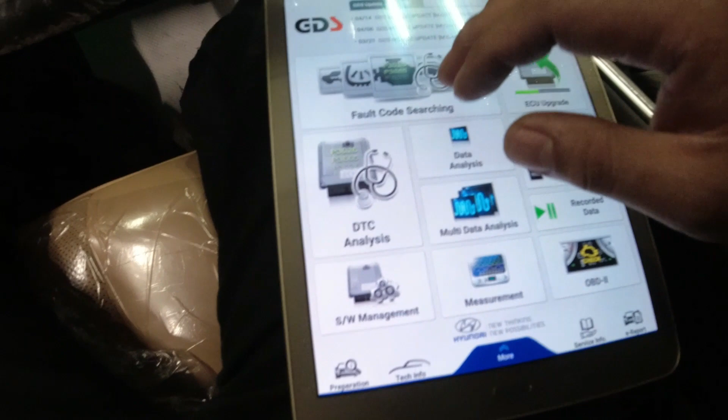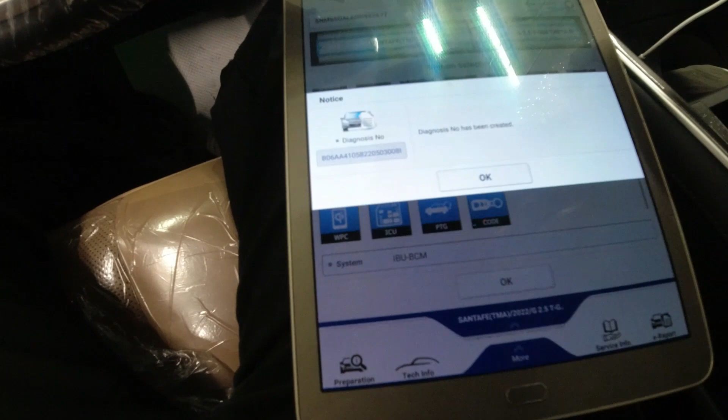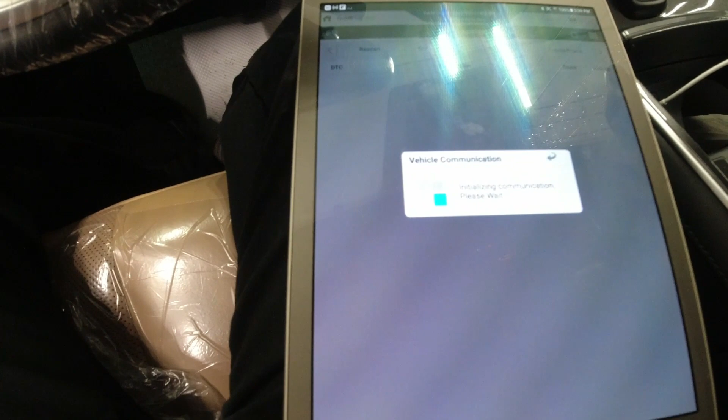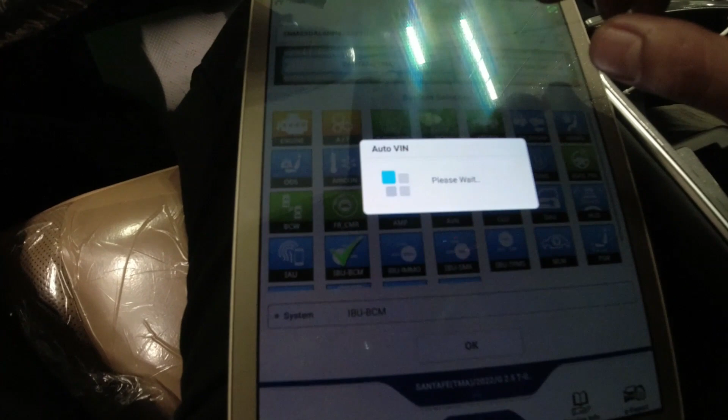Next, we're gonna do a system scan for codes, and we'll go for IBU because it's part of the body control unit. Okay, there's nothing in there, so maybe it's not in the body control unit. We go ADAS parking.

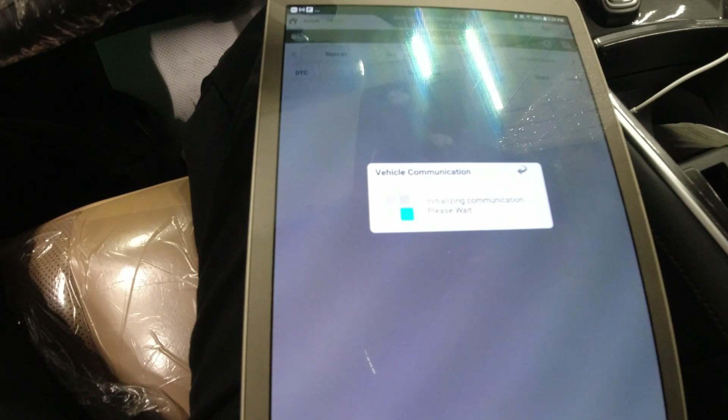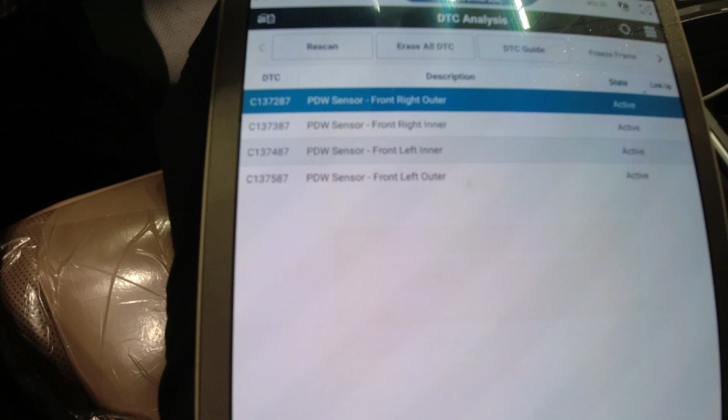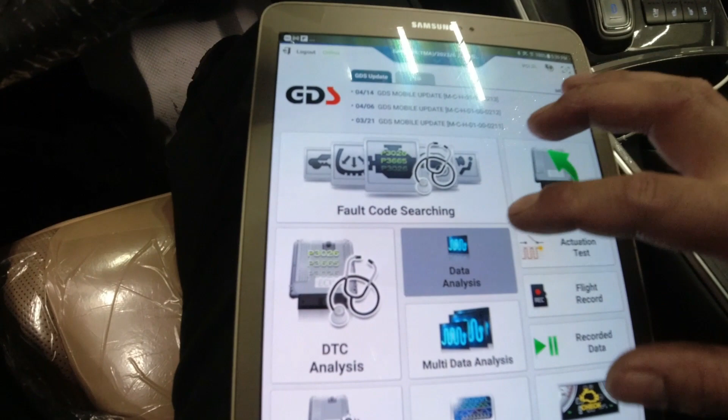Okay, so we have active codes here: front right outer, front right inner, front left inner, and then front left outer. So let's go back to our data. Let's just see what those sensors are doing.

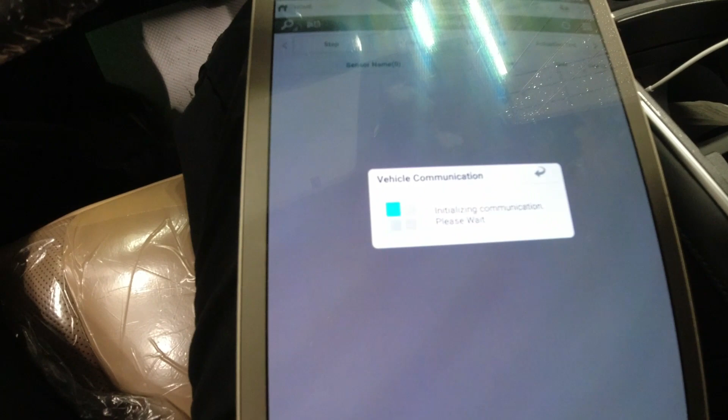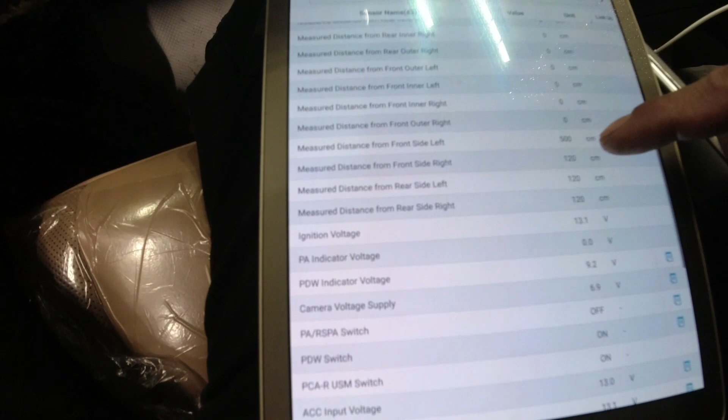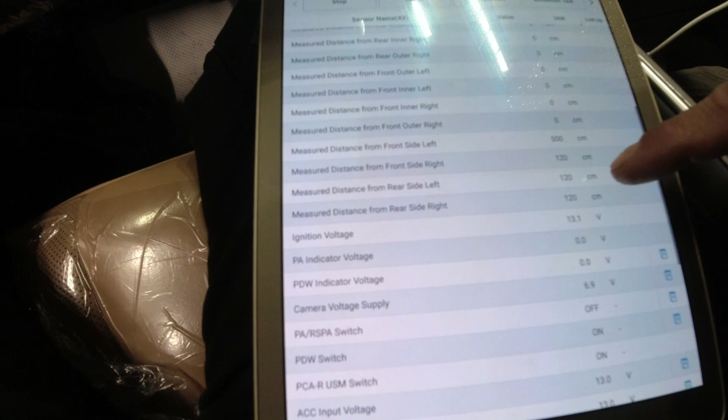And I think this car has six sensors on the front. As you can see here, front side left has 500 cm, front side right has 120, rear side left 120, and rear side right 120. Why is it showing that? I mean, I have codes for front.

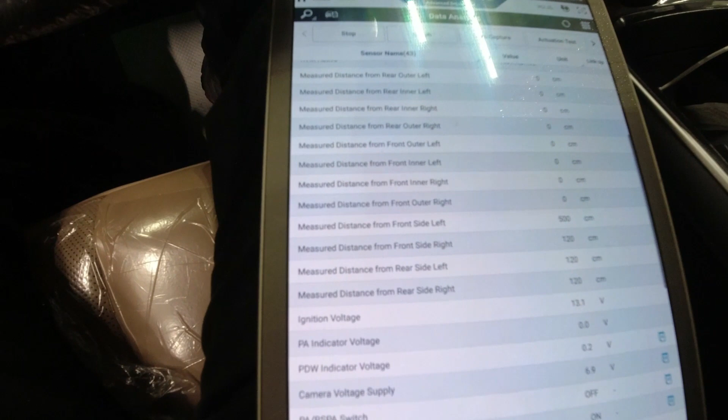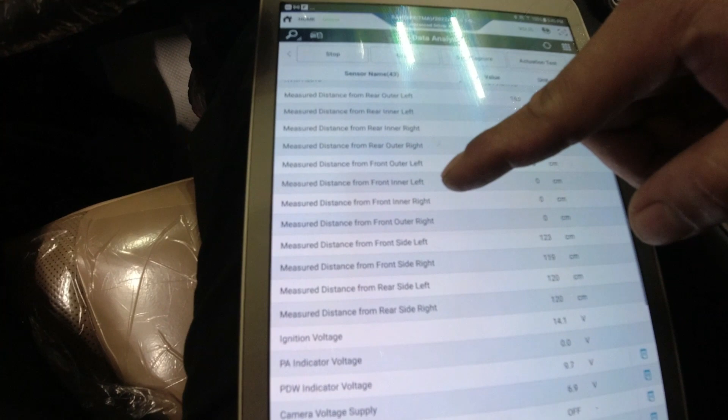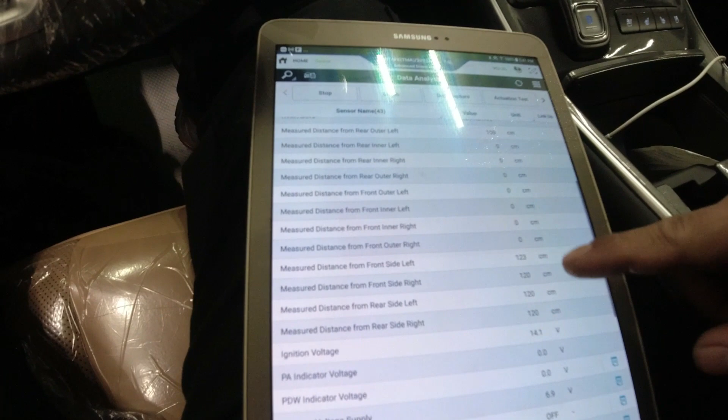Okay, let me go reverse and see. Outer is showing there, but on our inner side, front inner left, front inner right, and outer don't show anything here. But we got some here on the rear side. So right now, let's do a visual inspection on the front and see if we can see any damages there. If not, I'm gonna lift up the vehicle and maybe we can see underneath.

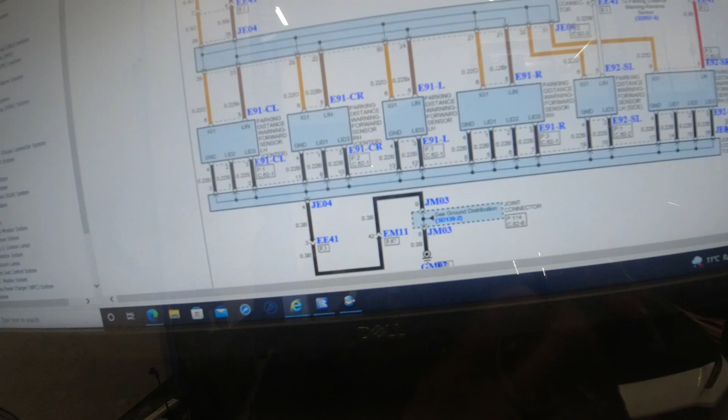So here's our parking sensors. As you can see there, it's all clean, right? So I pull up our schematic diagram. As you can see here, this is our front sensors. Let me just click this guy here, a joint connector component. So that's on the right side of the bumper.

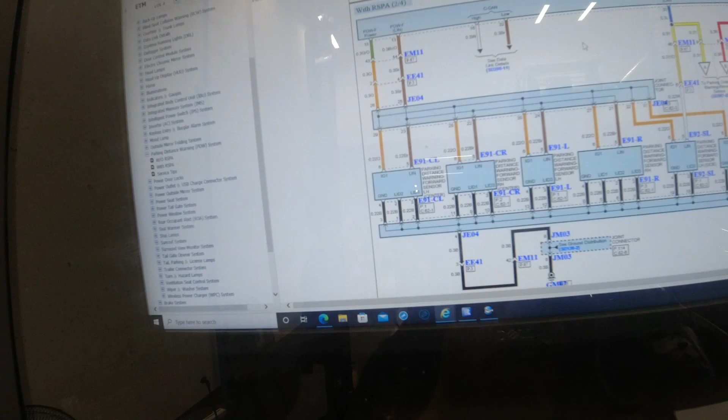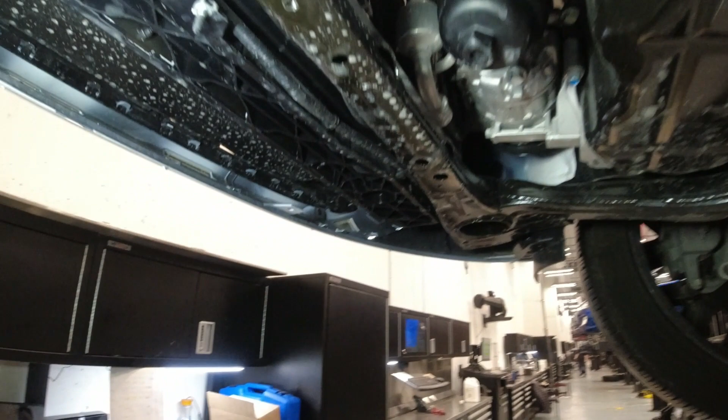Since we cannot see anything on the front or exterior side of the bumper, I'm just gonna lift up the vehicle and see underneath. Maybe we can see something in there. Okay, so I removed our undercover. We're just gonna do a visual inspection. So far, I don't see any damages.

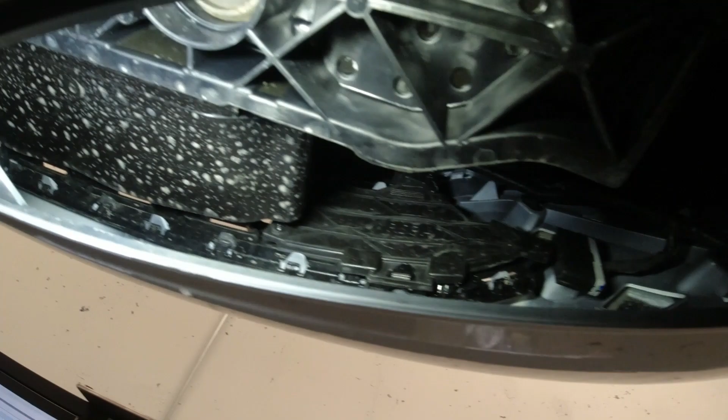For sure, I cannot see the sensors on the front because of this cover here. So I guess I got no choice but to remove this bumper. At least I can physically check it and then maybe do some testing. So I'll remove the front bumper and we'll see from there.

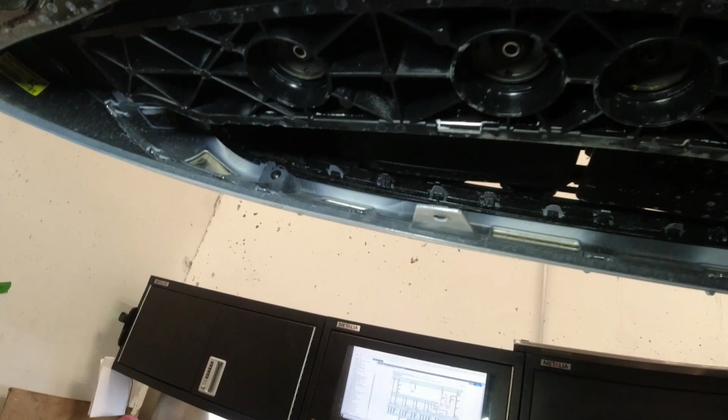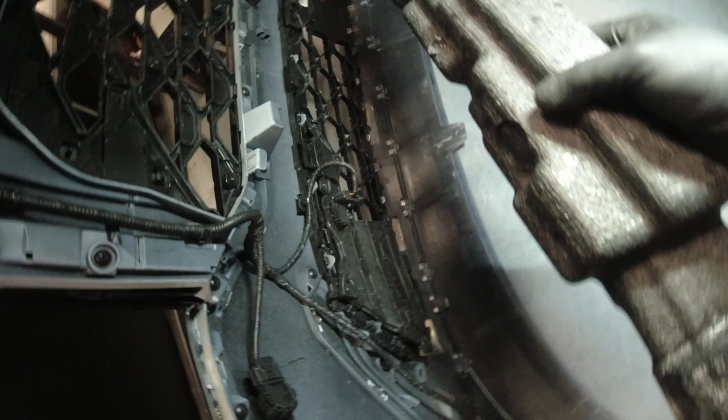Alright guys, as you can see, the bumper is removed, and I just took this foam out. We're concerned with these sensors here, right? I don't know if they have the same pins, but since you can see there's 6 sensors, maybe we can unplug one each and swap in the other sensor that is working.

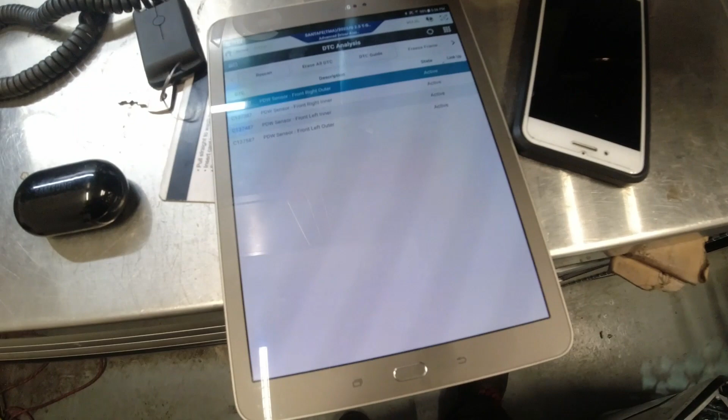So let me just remove one connector here and see. The pins look good. How about this guy here? Looks good there. So I'm gonna grab a scan tool and see if we can replicate this. So as you can see, we got front left inner, front left outer, front right.

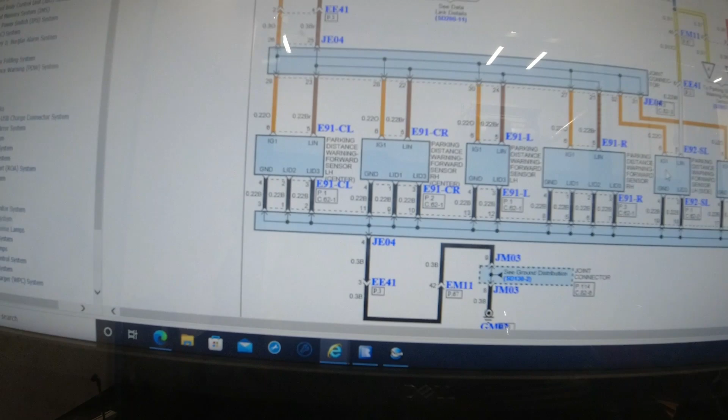On the wiring diagram, I can see that 1, 2, 3, 4, as you can follow my mouse, have a common connector, because these two here, the side sensors, have different LIN connections. Since the left side and right side sensors didn't give us a code, I'm thinking the power and ground is good. So I think we're dealing with the LIN bus here.

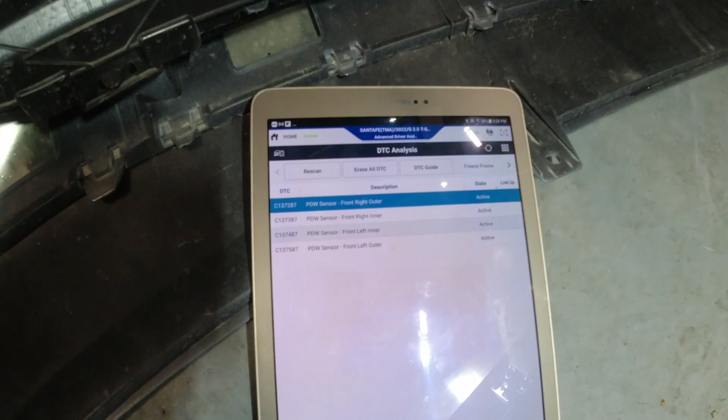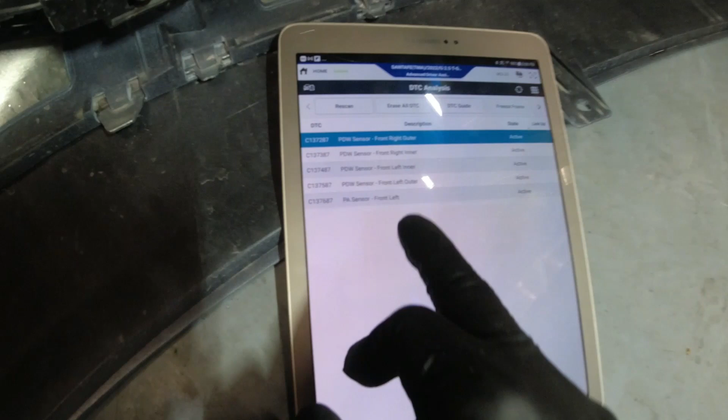So what we can do now is just see. Here's my scan tool. We still have 4 codes there. I'm gonna unplug the left side, and let's see if we get that code on the left side. As you can see there, we got PA sensor front left. So we got a code there. So I don't have to worry about power and ground on this guy.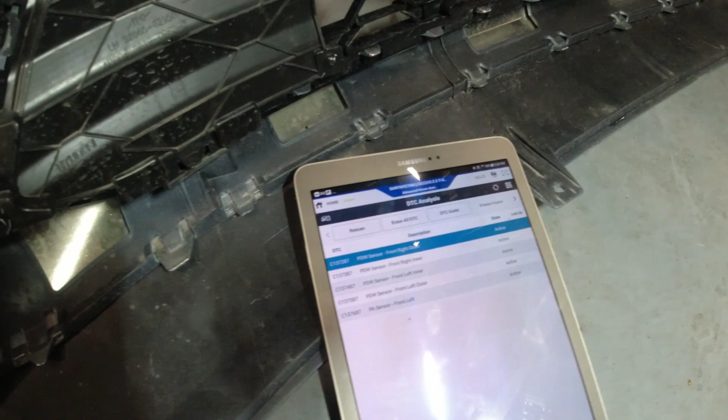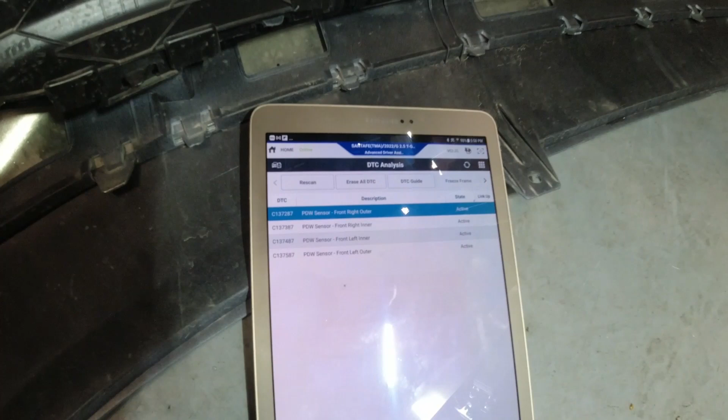So what I'm thinking now is we're gonna go check our communication line and see what's going on in there.

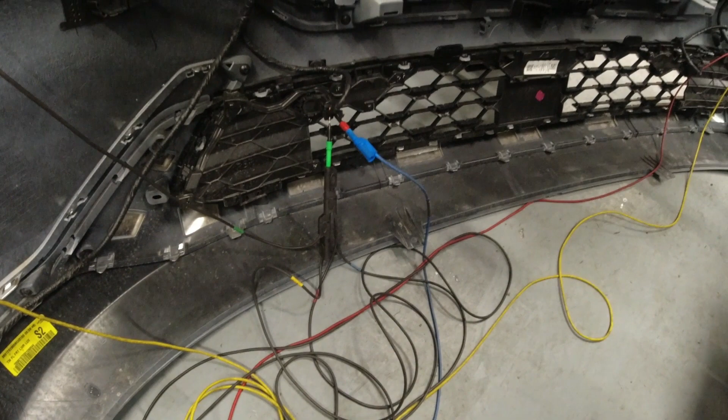Okay, so we hook up our scope to see our communication line, the LIN bus. So on our blue channel, that's the communication on the center. I am just using the sensor for that, the ground for that sensor, and then our red will be on the joint connector, and the green will be on the side, because we know that our side sensors are working, right? So let's go back to our schematic diagram or the wiring diagram.

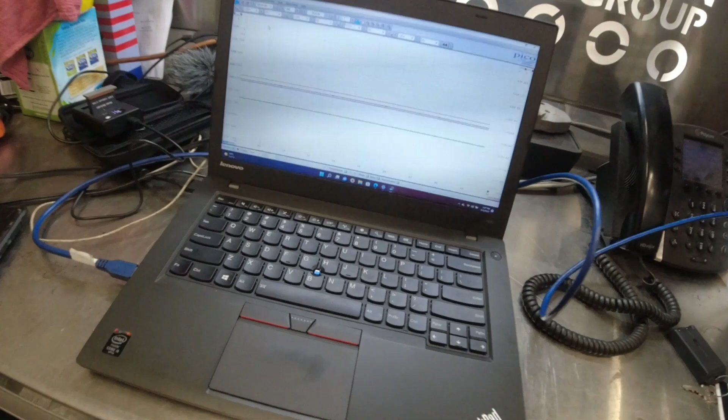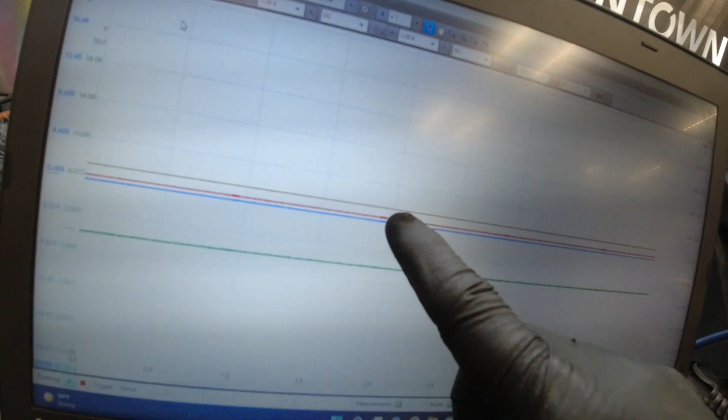So I hook up one here on the connection, right? We use the ground there, and I use this joint connector here, right? And then we use the communication on the side of the bumper. So on our laptop here, the green will be that side sensor, the blue is gonna be the front sensor, and the red will be the joint connector, right? So let me go ignition on or start the vehicle.

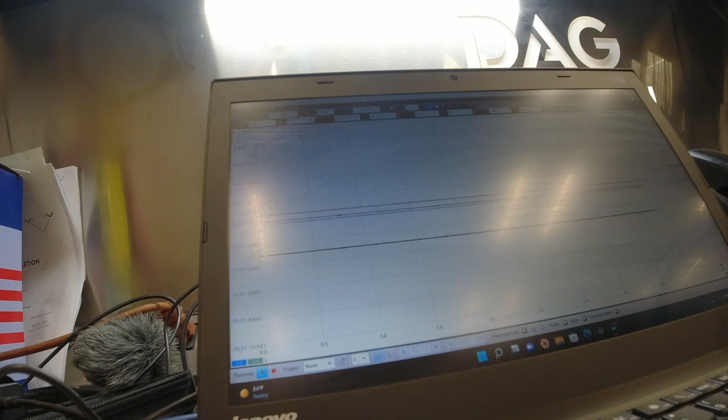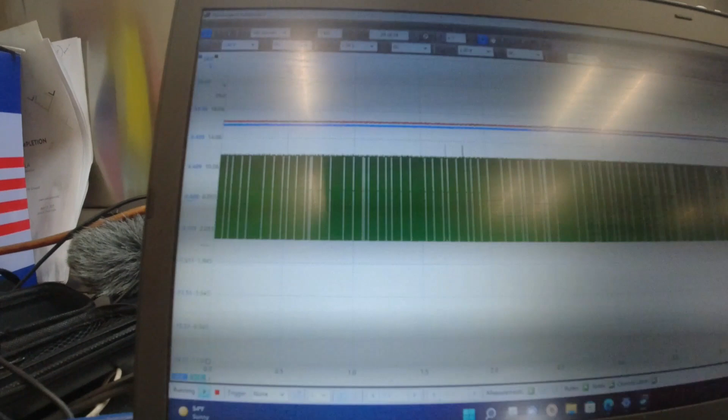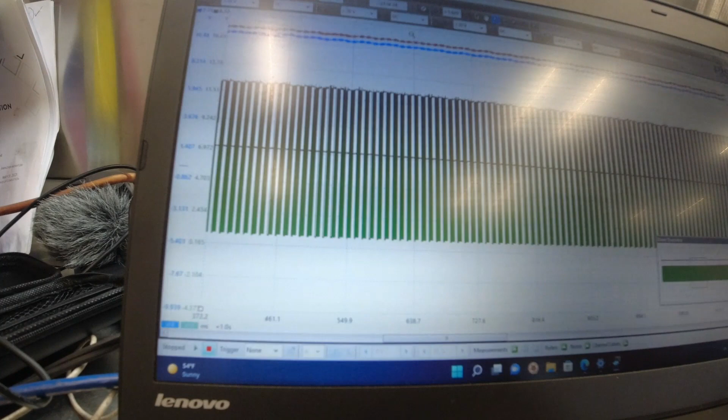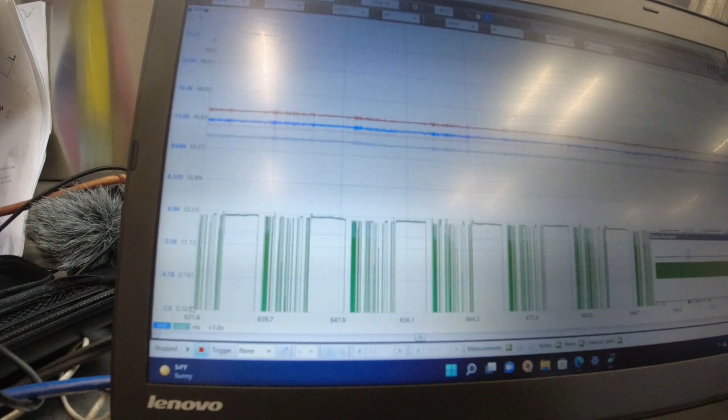Okay, so what can we tell about this waveform that we have? So let me stop this guy here. We know that our green one is the side sensor, which is the one that is working. So I'm just gonna zoom in. So that's our communication line, right, on the parking sensor on the side. On our blue and red, it's doing nothing at all, so it's not communicating from the sensor going to the module. It's not giving a feedback to that module, right?

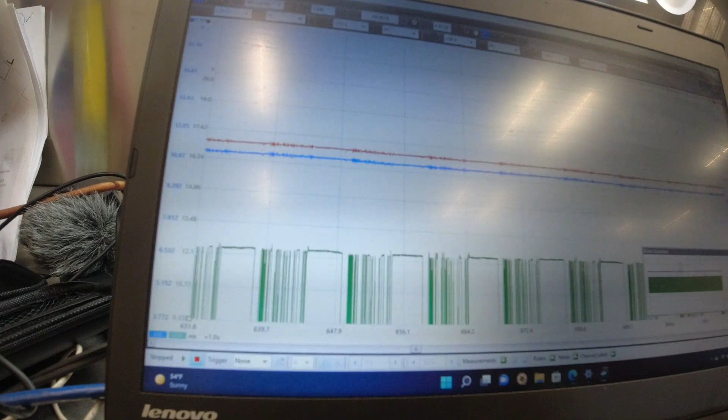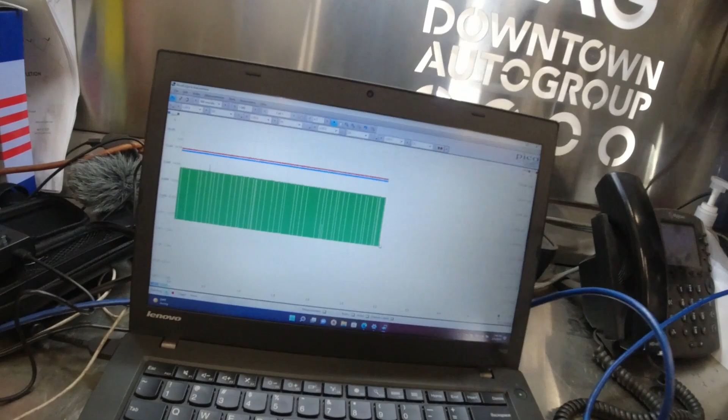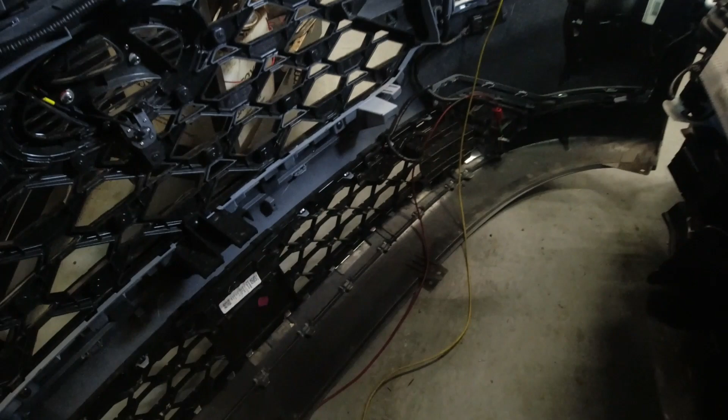So what we can do is maybe we can try unplug each sensor on the front bumper and see if there's any changes at all, right? And then we'll see. So let me move this guy here. So I'm gonna unplug this guy first here. Maybe we'll have a problem. So as you can see there, still green. The green is still working. I'm gonna unplug this guy here because we still have connection on the red channel. Okay, still the same there.

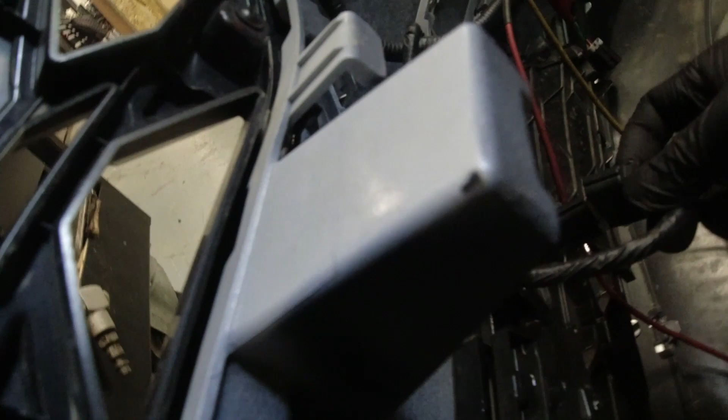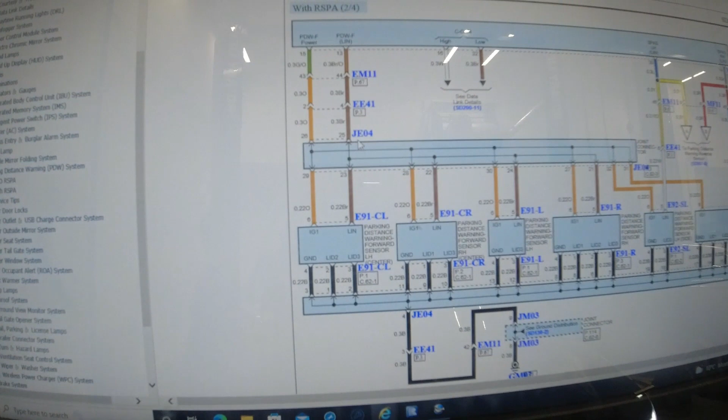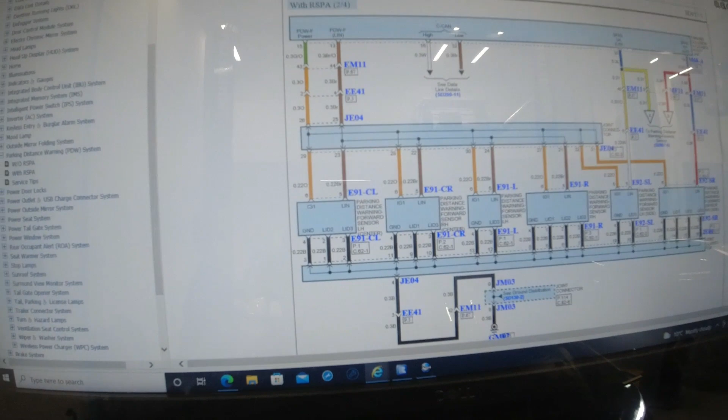Let me try this guy here. Still the same there. So, what's the last? Let's go to the wiring diagram and see. So next, what I'm thinking is, we don't receive any data on this JE04, right? This EE41, so that's on that side here. So let's unplug that and see what will happen, or maybe check the pins, because I checked all the front sensor pins, they're okay, there's no bent there.

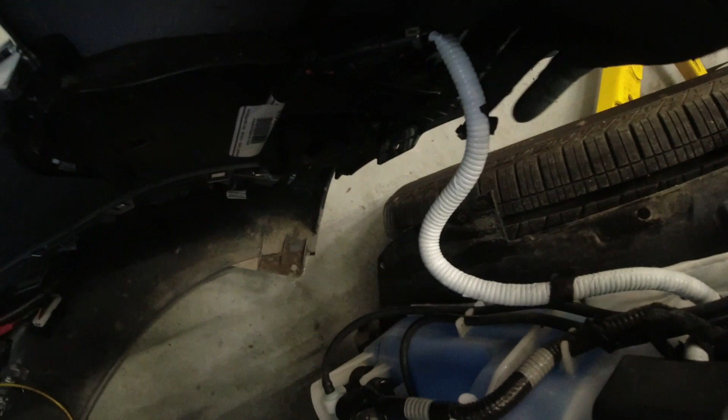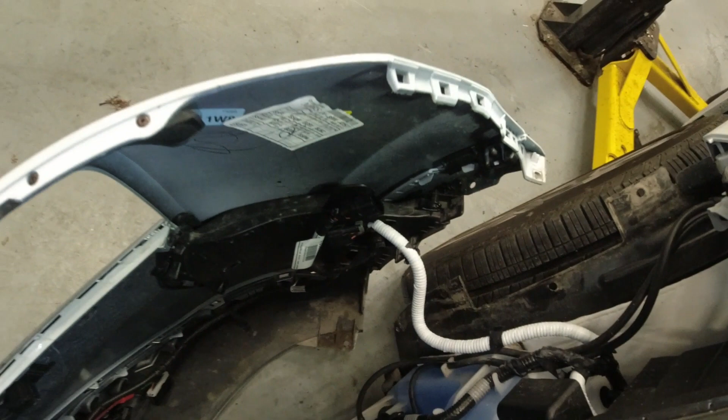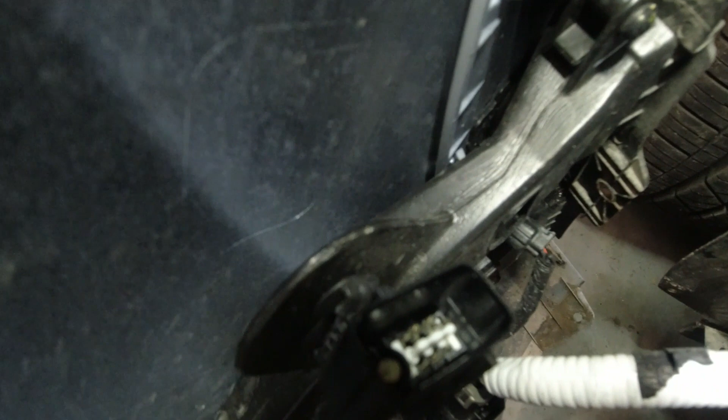And so that's this guy here. Let me just unplug this. Oh, so it looks like that's good. So how about the inner one? Oh, there you go. I don't know if you will see on the camera. Yeah, so it will show on the camera. As you can see there, the farther end, it's bent. Okay, let's try to adjust that, and then let's check our scope again if there's communication now.

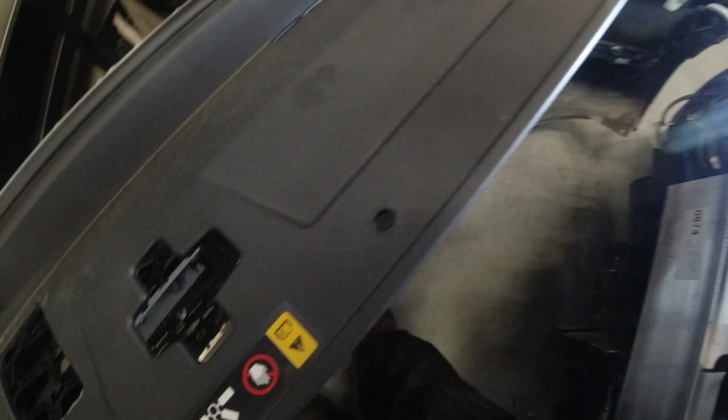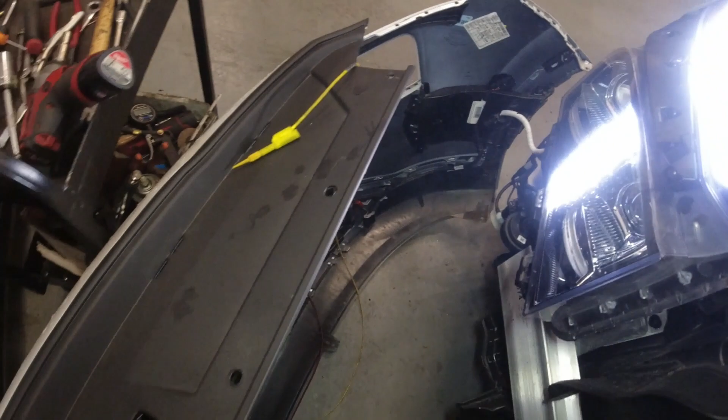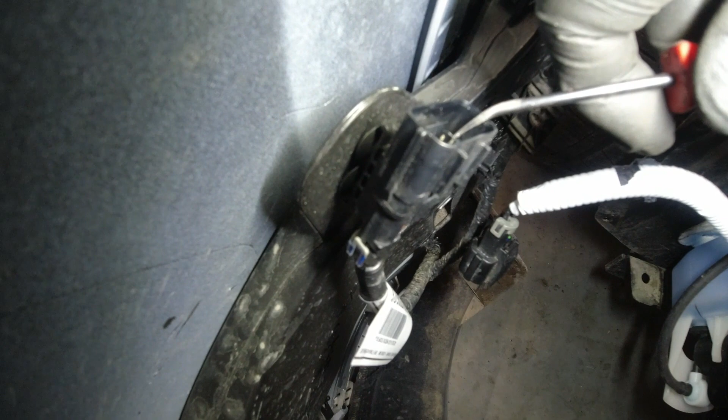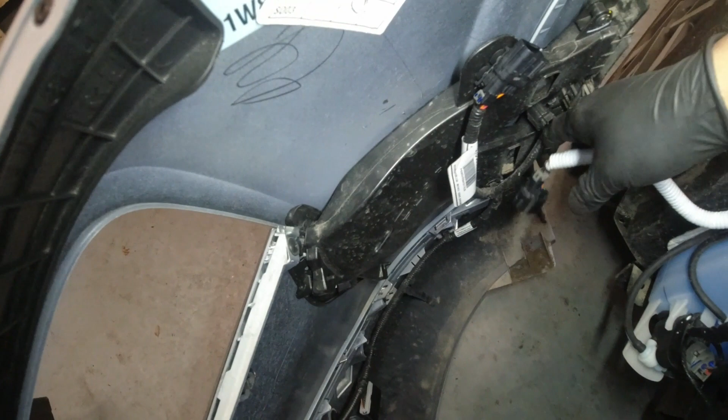You know what? Let me take a picture first for warranty. So I'm just gonna take a picture of it for warranty purposes. Okay. So the picture is there now. So let me just adjust this guy. I hope this is not damaged. It looks straight. I'm gonna plug this guy in. Okay, it clicks.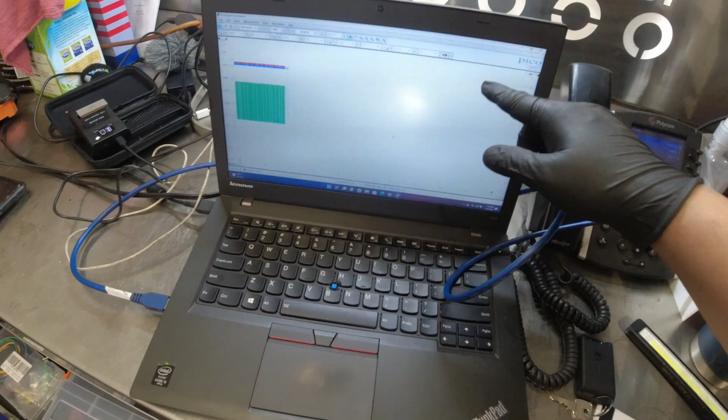So now we're gonna activate our front sensors, right? And then let's see. Let me leave this camera here so that you all see.

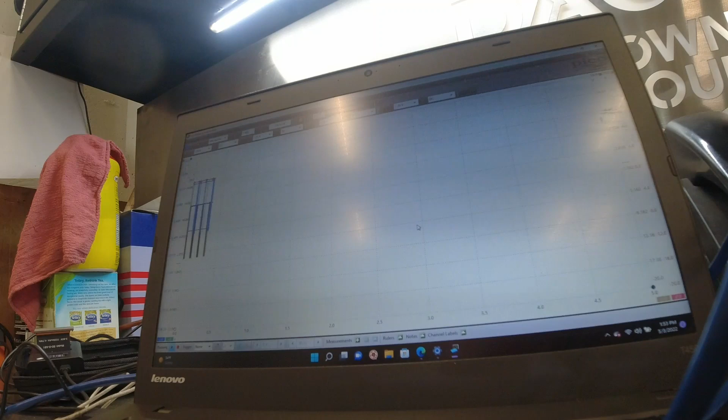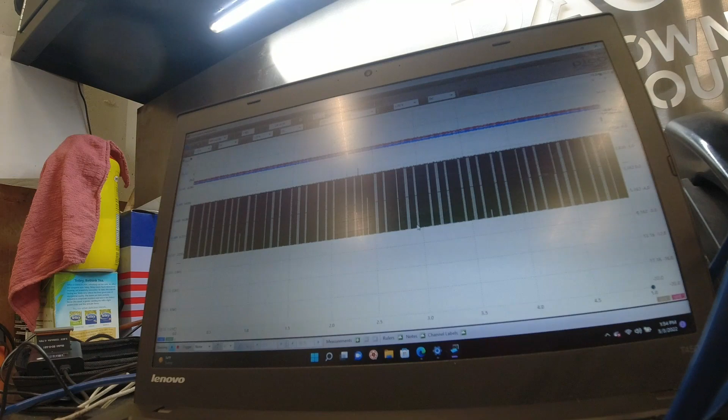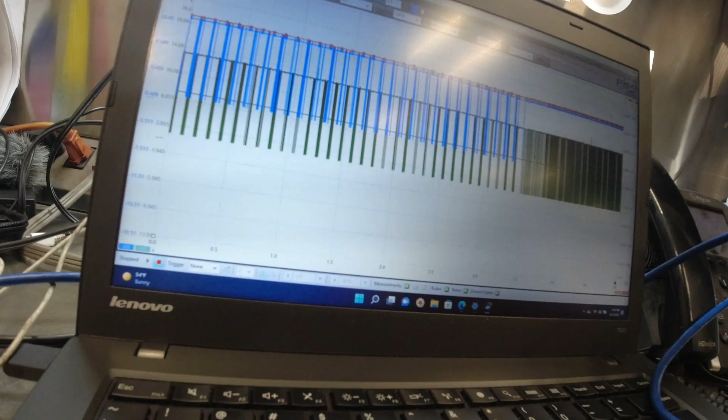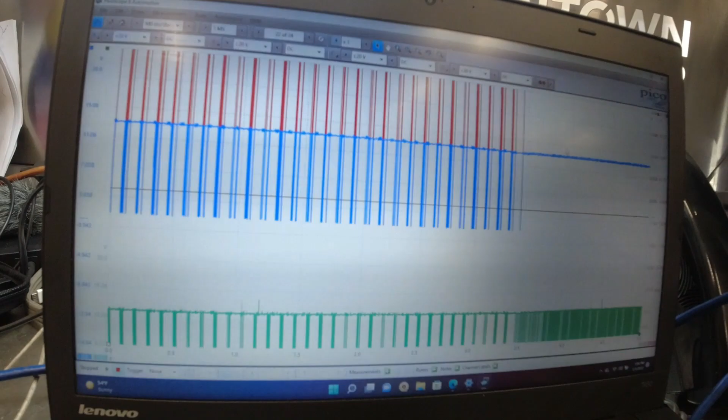So clearly our blue trace is working now. Let me just go back. I don't know if the red one is communicating now. It should. Yeah. So as you can see there, red and blue are mirroring each other. It should, because it's the same communication line. Let me lower down this green one because I don't need that. Yeah, and then let's go to the car and let's confirm our fix. The bent pin.

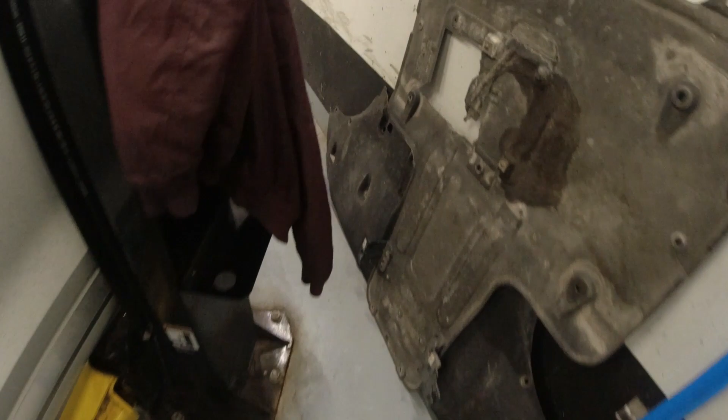So it's gonna go reverse. Yeah, now as you can see there, it's beeping now. Right? Park. Let me go drive because that's a forward. Yeah.

Okay. That's it, guys. So I know that it's unlikely that all four sensors will fail. There's a possibility too, but I don't really think that it's all four sensors. So we did our scope capture, checked our LIN bus, then we narrowed it down when we did a visual inspection of the other side of the connector, and we found the bent pin, right? Bent pin. So I hope you guys enjoyed that process of diagnosing this parking sensor in the front.